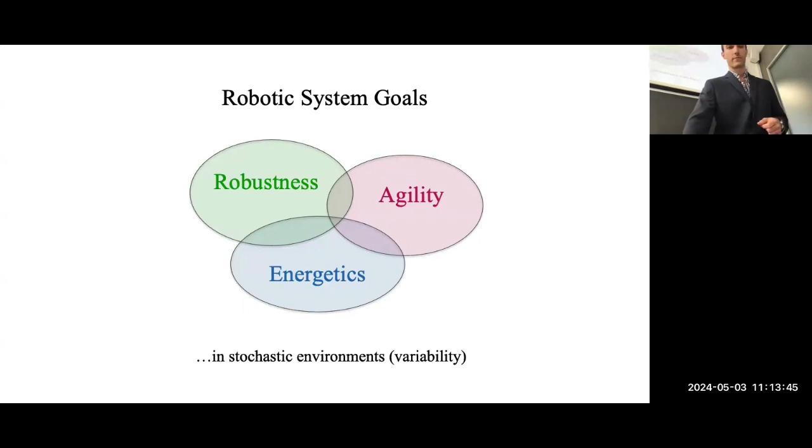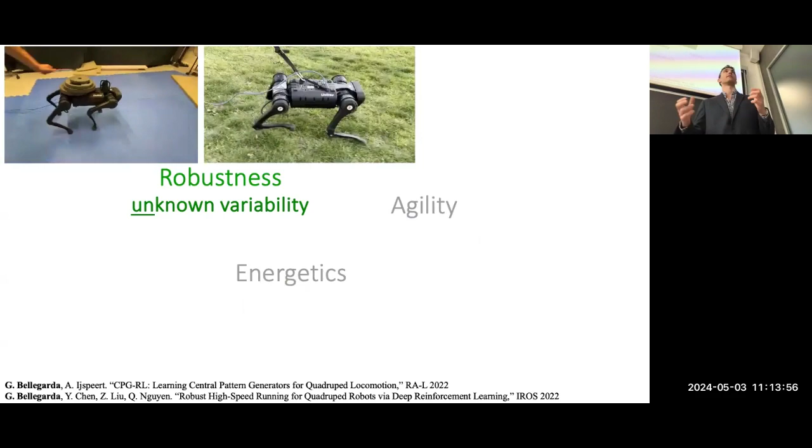So what do we mean by robustness? We want our systems to do well, even under unknown variability. For example, here we have A1 walking with an unknown load on top of the robot, or maybe here we have some uneven terrain over bumpy grass. We don't have direct knowledge of this. We don't want the robot to fall over.

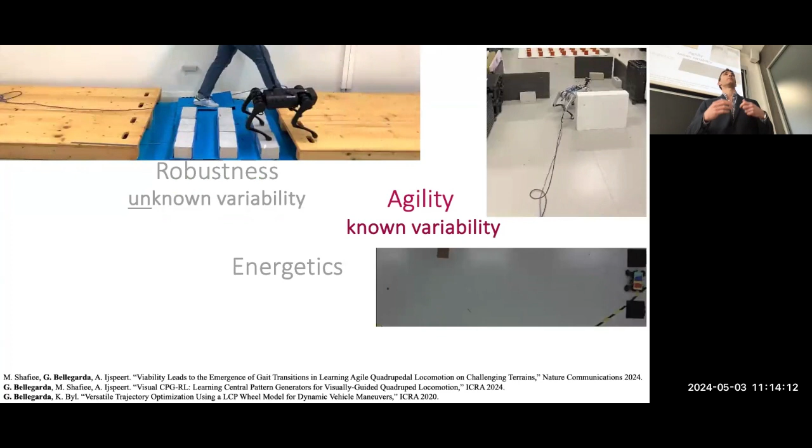By agility, we mean we want to be able to do well in areas that we do know about, right? Maybe we have some kind of gap crossing task. We want to be able to plan some motions to cross as quickly as possible. If we know something about the environment, to be able to navigate around it, maybe something about the coefficient of friction, to be able to plan some dynamic parking maneuver.

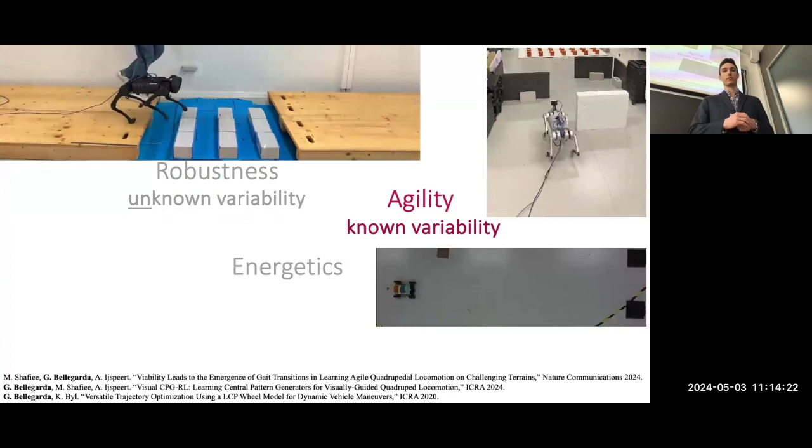And ideally, we want both robustness and agility while being as energy efficient as possible. Wheels are very energy efficient, and we can still plan some dynamic parking maneuvers, for example, here. And of course, there'll be some trade-off between each of these goals, right? Maybe we need to use a bit more energy to be more robust in the rough terrain. This is a good trade-off.

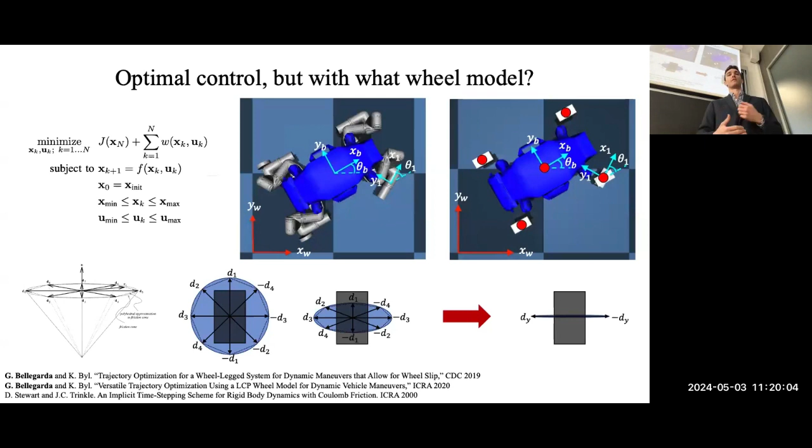So with this wheel model, for example, we optimize for this dynamic parking maneuver. Here, now we are optimizing through contact. You can see that this wheel is perpendicular to the rolling direction here. So it's basically skidding to be able to turn more quickly when we start with some velocity.

So this is the MATLAB animation of this same maneuver. Then we have a MuJoCo simulation of the skidding maneuver. I didn't have access to the real systems, so this is in simulation for this work.

Also, by changing just the cost function, now we want to maximize the forward body position while minimizing energy use. Now, instead of this kind of constant kinematics with sinusoidal waves we were trying to do before by hand, the optimization finds that as we gather speed, we can get smaller amplitudes to be able to move faster. So as we gather speed, we don't need to do such exaggerated motions.

And this is the MuJoCo simulation of the same maneuver. And now since we have legs, really the interesting thing here is can we do some hybrid rolling or walking and trotting? So in the optimization, we can also put, for example, a gait. So we have some contact schedule that we're putting in. Static walking gait, we're bringing one foot at a time. Static trotting gait, we're bringing up diagonal limbs off the ground at the same time.

So this is towards, like, if you want to come over some kind of partially rough terrain, maybe go over a curb. So this would be towards that kind of maneuver.

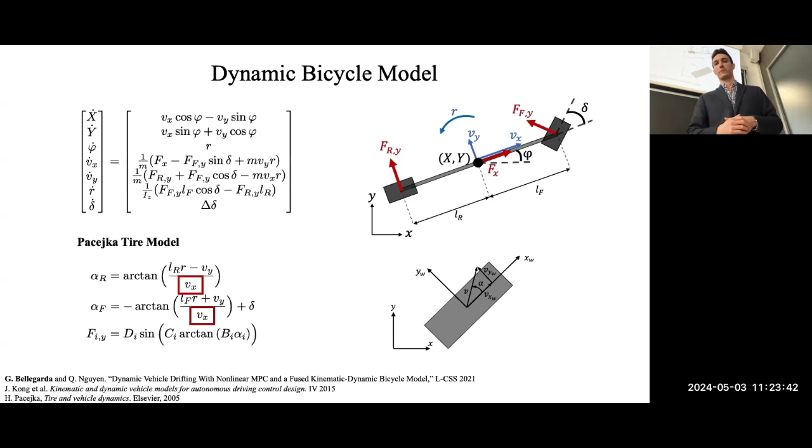So one observation is that at low velocities, the kinematic model actually is a good approximation, right? Maybe the forces are less important. We can define something like some short parking maneuvers problem. So maybe we can use the kinematic model at a lower velocity, and at higher velocities use the dynamic bicycle model where now the forces are more important.

And here we're just going to basically interpolate between these models based on some velocities that we have some pre-existing knowledge about of when they're important. And then this is going to be based on the overall velocity of the car, so both forward and lateral velocities. So what can we do with this model?

So we're going to look at three different tasks. First is steady state drifting, where we'd like to have some forward velocity and also some yaw rate at which we drift. Also, we care about drift parking generation. So we'd like the car to end at some particular position and orientation at the end of some longer trajectory. And afterwards, we're going to track this trajectory online using nonlinear MPC on some shorter time horizon.

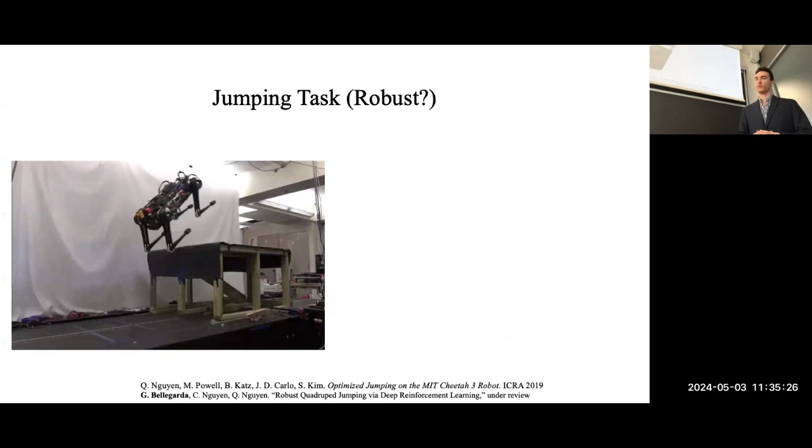So is this jumping task robust? Here we have the MIT Cheetah 3 jumping onto this platform. Here we have very good knowledge of the whole system. There's markers on the ground where the foot should be before the jump. We have the full dynamics of the system, right? We know exactly where it should land.

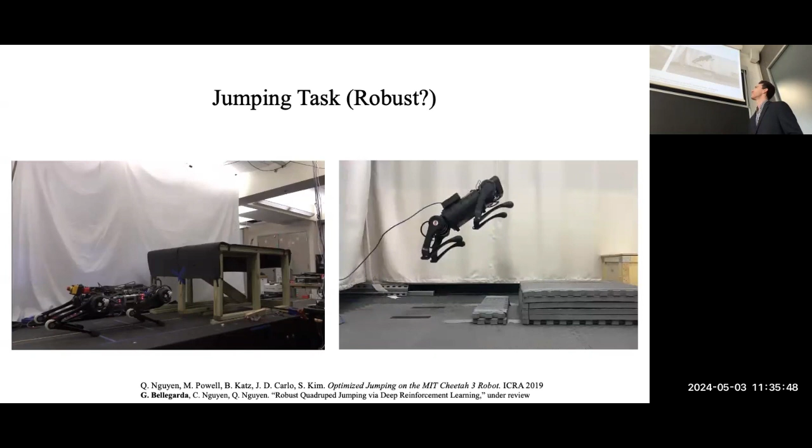But now if we just have some small block underneath the front limbs, we tried the same trajectory, right? It didn't pitch correctly, and so it didn't get onto the terrain. So how do we improve this?

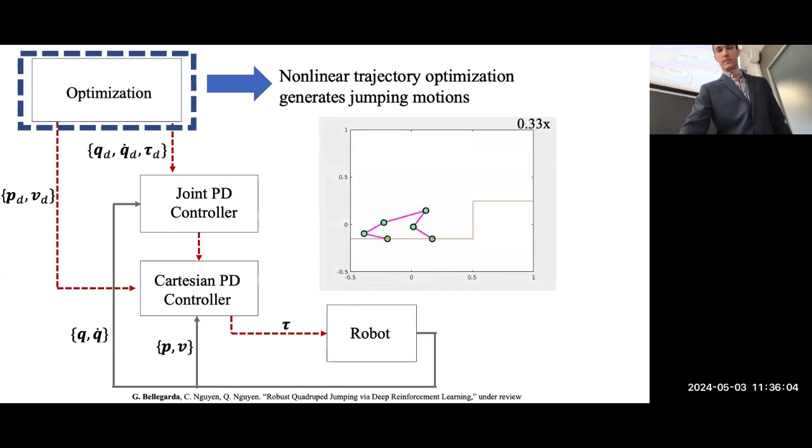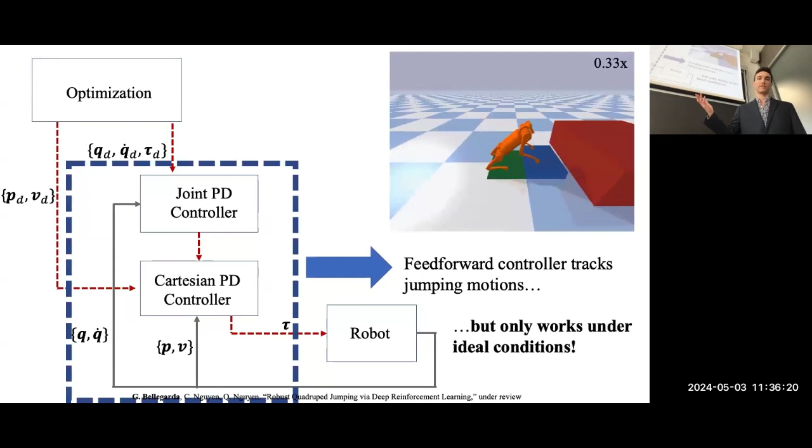So this baseline jumping, we have some nonlinear trajectory optimization to generate the jumping motion to get onto the platform. Now we have some feed-forward controller just based on the output joint torques, joint positions, velocities, torques, and also the desired foot positions, which we just apply feed forward to the robot. However, if we have some block underneath the front feet, right, we overpitch, this doesn't work anymore. So how can we try and improve the jumping with learning?

So here, jumping involves very specific joint trajectories. We have an all-foot contact phase, we rear onto the rear legs, which is the rear foot contact phase, and we have a flight phase where we can't control too much. This is a very specific kind of trajectory, which is difficult to learn from scratch. How do you write down a reward function to say, okay, at this point, the robot should be in the air, right? This is not obvious to do.

Maybe we can do some imitation learning. We already have some jumping trajectory that we have in implementation as a warm start for the learning. Maybe we can learn on top of that or continue learning afterwards. But we already have an approximate solution in the ideal case, right? So maybe we can learn to modify our existing trajectories for robustness. That's some residual learning on top of what we've optimized.

So in our controller diagram, this will look like this. We want to augment the optimization with deep reinforcement learning. So RL will basically continuously take the current state, the desired end state, and then learn to modify these foot positions that are then augmented to what we already have from the optimization. So continuously, as our feedback controller, we go from RL, we're adding the desired foot offsets onto what we already have from the jumping trajectory.

So here now during offline at the beginning, we'll optimize for different jumping trajectories of different distances and heights, and then learn the feedback controller over various different terrains. We have randomness in the environment, different heights and masses, inertias, ground uncertainties like blocks underneath the front feet, and also different frictions.

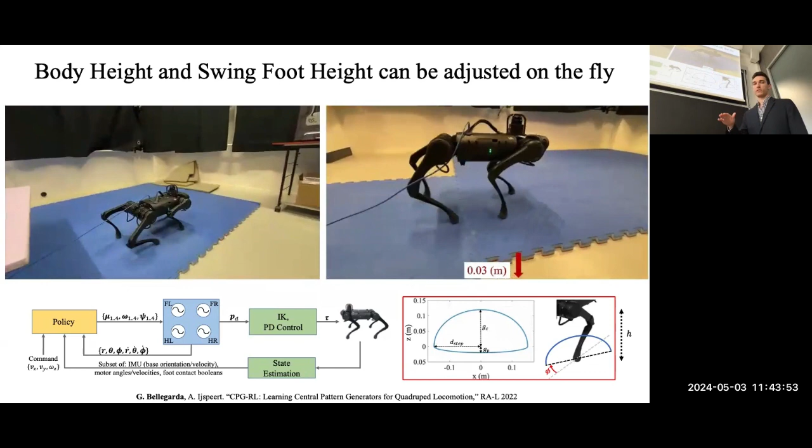Here I've just modulated the height as we get closer to the tunnel, saying okay, the height should be this. The robot goes under the tunnel and comes back up on the other side. And here I'm just on the fly changing what the ground clearance should be, just in the pattern formation layer.

We can also try to answer some questions like what kind of sensory information do we really need? What is really needed to coordinate locomotion, and how should the robot actually move? Traditionally in CPGs, this kind of coordination is based on a force feedback idea: we have the phase dynamics, the set nominal frequency, coupling with other terms, and then a force term for whether my limb is loaded or not. So the idea is if I'm loaded into the ground with a strong normal force, I'm in stance phase and shouldn't try to pick up this foot off the ground or else it will basically fall. Likewise, if I'm in swing phase and get an early contact, I shouldn't still try to push this foot into the ground. So basically it's trying to slow down or speed up the phase based on environmental interactions.

We wanted to see if this is enough to coordinate locomotion, so we removed all sensory information input to the policy network except foot contact booleans. This is a pretty surprising result that this actually worked. We didn't have any noise randomization through training, which we usually need a lot of to bridge the sim-to-real gap. So the only feedback the robot has from the environment is whether each of its feet are in contact with the ground, and this is still enough to get the robot to walk. It's not as smooth as before, but it's still not falling - it's moving forward.

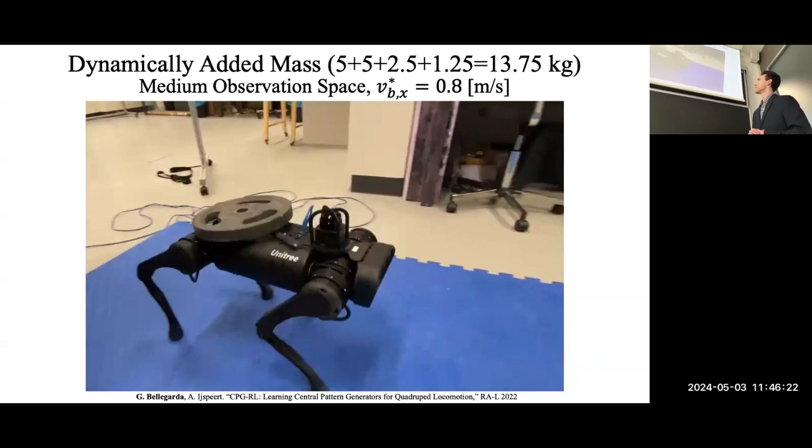A1, the robot here, is 12 kilograms, and we were able to put 13.75 kilograms on it - all the mass we had at the time. This is over 100% of the nominal mass of the robot, and basically we don't see too many differences.

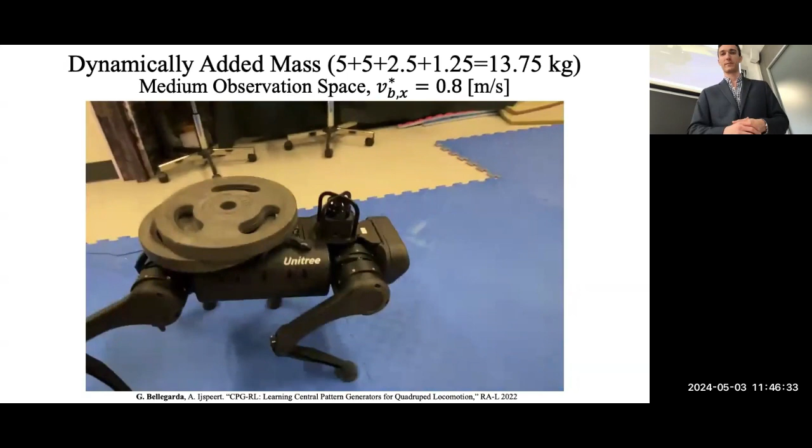We also looked at omnidirectional locomotion - here are some example tests of turning around in place or moving laterally with both observation spaces. We think probably the joints are more important when turning laterally, so hip adduction and abduction are important. We also trained and tested on this other robot, which is slightly different - this is a Unitree Go 1. This is also working well; it can still turn laterally and turn about desired yaw rates.

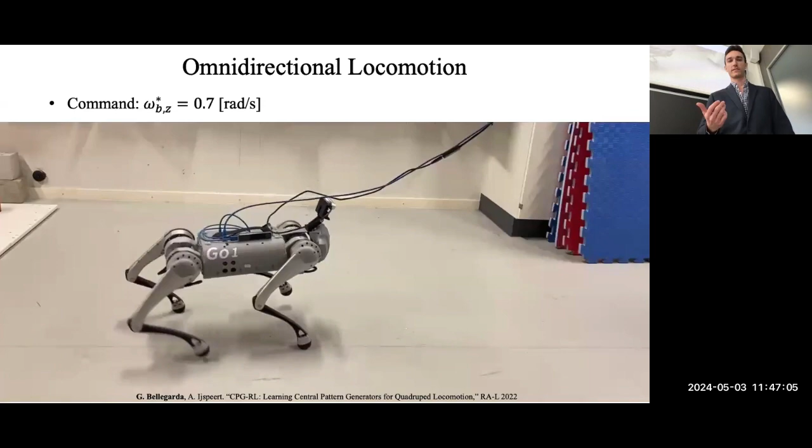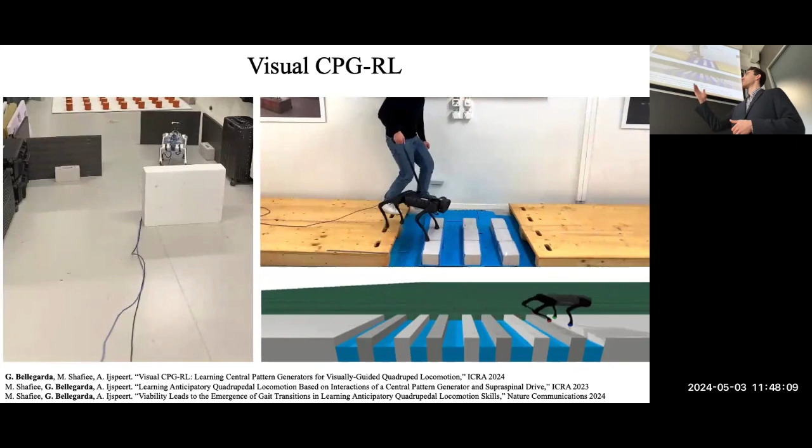Also, we're looking at adding vision in the loop. So on top of what we were looking at before with proprioceptive sensing, we also have vision in the loop, for example for a navigation task, and also for different gap crossing behaviors. Here we're looking at what sets the gait transition for the animal.

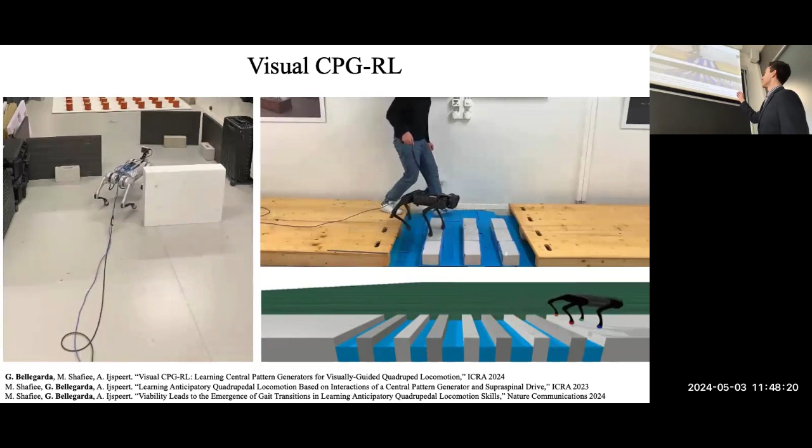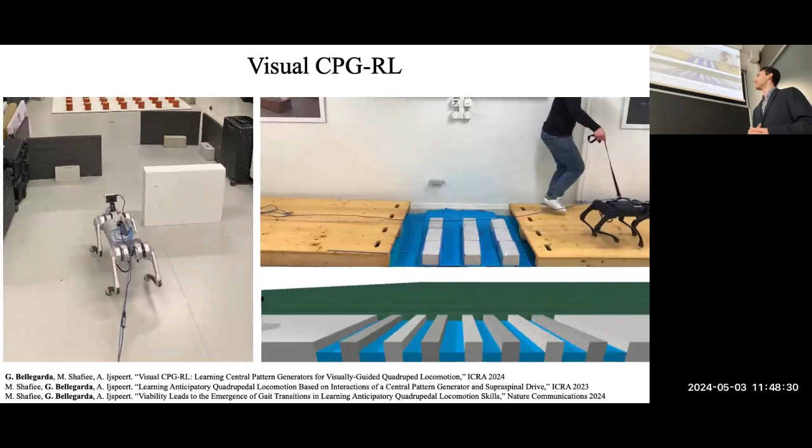Here we see at the beginning the robot is trotting, so we have diagonal limbs moving. Then based on environment feedback, it has to transition to more of a pronk or jumping gait to get over. We didn't script this - it emerges naturally through this bioinspired framework that we have. Yeah, it seems to work well for sim-to-real.

Also, all this was being trained offline. So now we're also looking at how much can we optimize directly online. Here we're inspired a bit by frogs - they have these really nice abilities to turn and jump, it's super nice. So here we're trying to see if we can optimize similar behaviors online. Of course the morphology is a bit different, but we're trying to see if we can have some kind of robustness over different terrains. We're using Bayesian optimization, trying to optimize these foot force profiles to produce these jumping behaviors, and see how robust it is with different control methods.

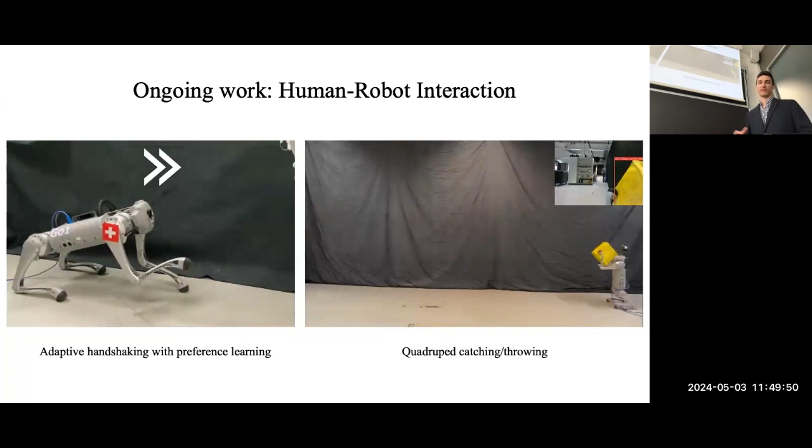Some ongoing work, I'm also looking at human-robot interaction, trying to adapt to human preferences with feedback from the robot - which of these handshakes does the human prefer, trying to optimize for basically dynamical systems parameters. And here on the right, we're looking at quadruped catching and throwing. Walking around is not super useful for the quadrupeds, so it can actually interact with the environment and do something more involved. Here we're looking at throwing, and the next part will be catching with the robot.

I'm interested in very diverse systems like robots, vehicles, manipulators, and swimming robots now recently in the lab. Also, I think very important is policy interpretability and robustness guarantees.

We can kind of forecast, see what should our future states be, and maybe we can add some constraints in the artificial neural network, or even maybe remove many of the layers. So some ongoing work is looking at how many neurons do we really need to express this kind of locomotion.